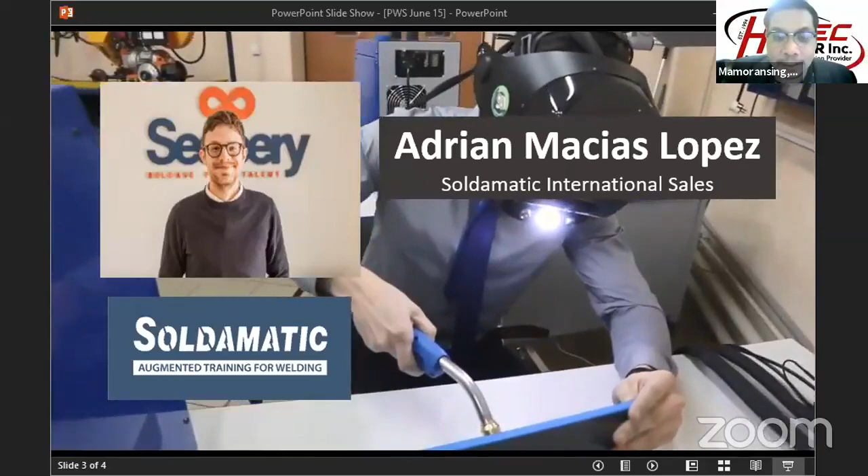Adrian? Hello everyone, and thank you very much, Chris, for the introduction. Is the sound going through? Can you hear me? Yes sir, is it going through? Loud and clear, okay cool. Perfect. Before we begin, can you please confirm how much time we have so both speakers can have the same amount of time for the presentation? Can we do it in 15 minutes? Okay cool, so I'll try to speed up some of the slides.

Thanks, Chris. So to start with, let me just share my screen.

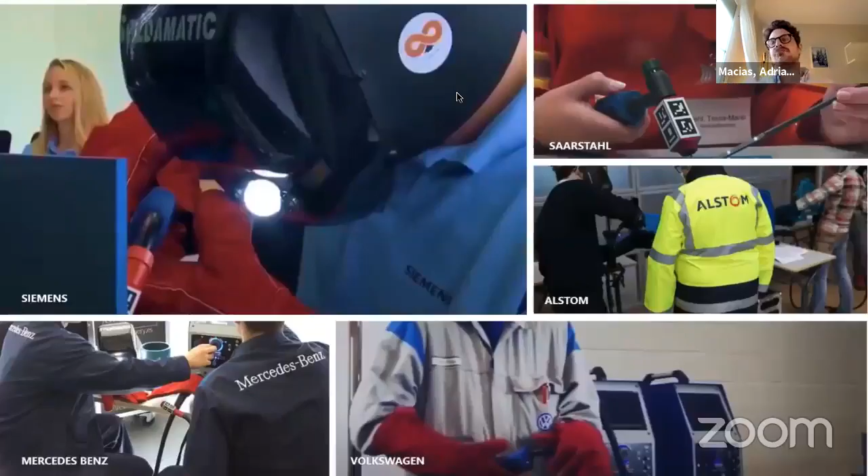And those clients are mostly in two different areas of work. We work with industrial ones, mostly in automotive, railway, shipbuilding, and energy, people like Volkswagen or Mercedes-Benz, etc. But also on the educational or institutional side of things, so we work with people like Weld Australia, the German Welding Society, or TAFE, also in Australia, which is the TVET organization of the Australian government.

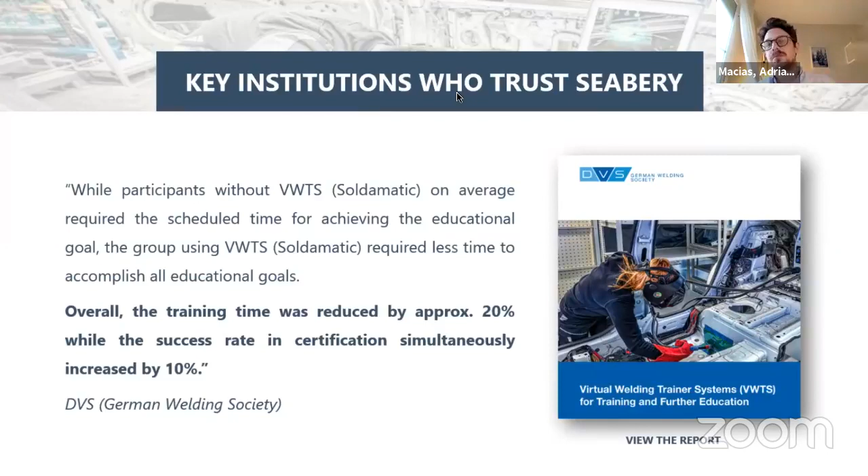With those organizations or bodies, we work for a couple of things, mostly supporting them on training, but also for feedback. So we basically collaborate with them to have their expertise and include it into the Soldamatic. People like Weld Australia or the German Welding Society are very much involved and aligned on how what I'm going to show you works in many aspects.

Having said that, I'd like to talk a little bit about the 4 or 5 macro trends that we have right now worldwide, and how those macro trends are related with robotic training or welding robotic training.

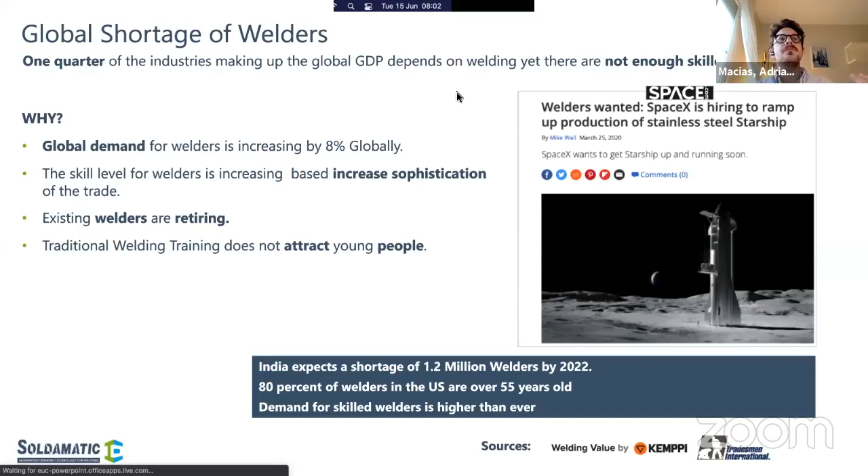The first of them is the global shortage of welders. That's something we see not only in Europe, even though it's most significant in European countries, the US, or some countries like India, but it's basically across the world. Almost every country has issues finding the welders they require to keep on going with the industry levels they have.

Countries like India, or even in Southeast Asia, it's very noticeable that the economies of those areas are having issues finding the welders required to keep on going with the industry levels they need to continue economic development. And that is related to how we are not being able to attract enough people into the welding world or welding career, which touches many of the aspects we are going to talk about today.

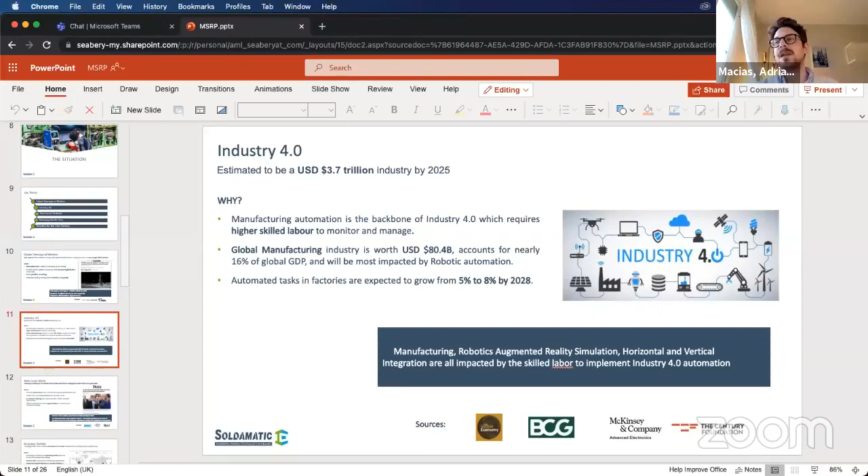Now the second big point—let me just share my screen back again—the second big point, which is actually related to what Stanislav was talking about, is Industry 4.0, which most of us are familiar with right now. That's basically how different technologies like augmented reality, automation, virtual reality, and others will impact the industry.

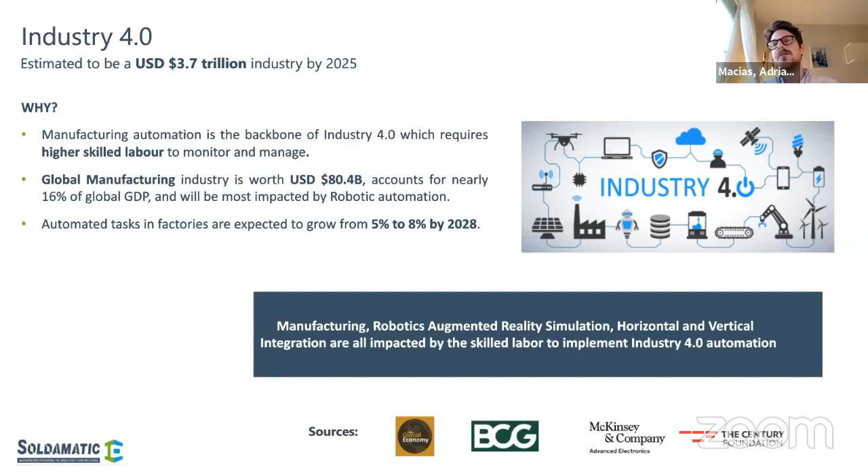What happens is that these new technologies are not being known by a significant number of the population at this moment. We are not training people on these technologies, or on how they affect the industry.

Now a third big trend, obviously, is the post-COVID world—the world that we will probably have in 1 or 2 years, and how it's going to look, and how it's going to affect industries, mostly for the educational side. Still, many countries, not only in Europe or Asia, are in total or partial lockdown, so people cannot go to schools or training centers. It's kind of unclear what is going to happen in the next few months or even years, and whether there is going to be any change because of COVID in that sense.

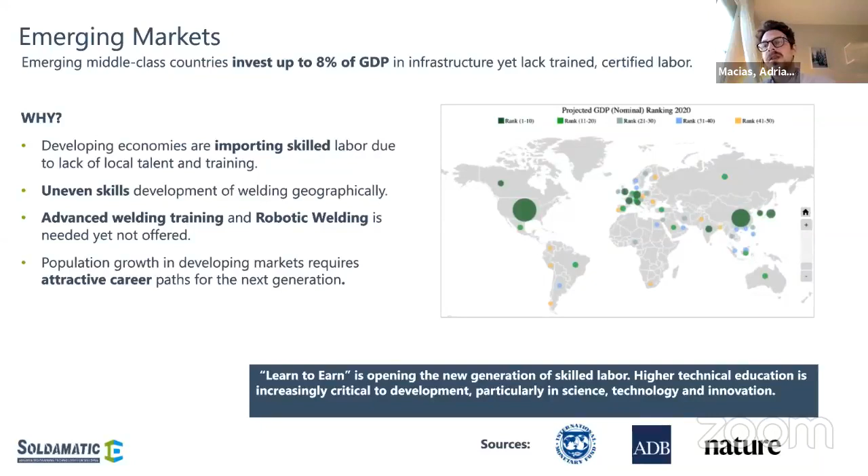Fourth is the growth of new markets or new countries, where the Philippines and Southeast Asia have significant weight. Countries like the Philippines are growing quite rapidly compared with European ones. In the next couple of decades, we're going to see how those countries in Southeast Asia acquire a much higher level of economic development. So those countries need quite a lot of training right now, or skilled people to sustain that growth, and they will need even more as they keep going on the path of economic development.

And the fifth one, probably the wrap up for these key trends, is how robotics are at the end of the day the backbone of automation and industry development. One big thing is that welding is behind almost any industry in the world and is somehow responsible for almost any economic development related to industry. And that is linked at the same time with robotics.

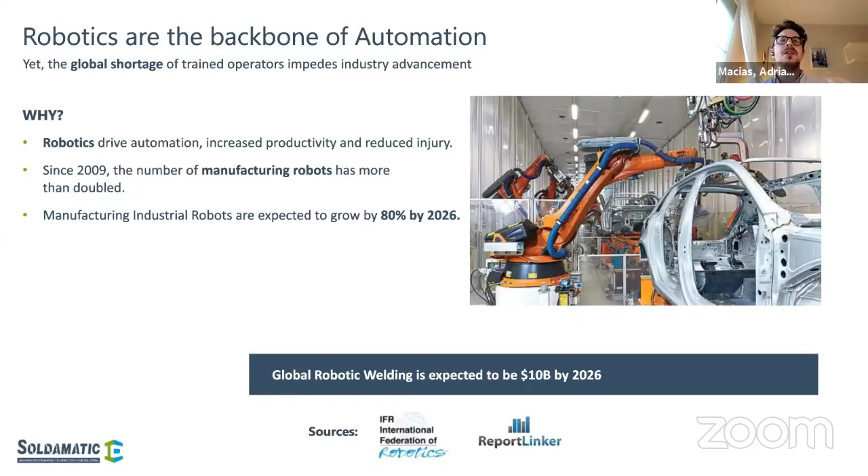So how are robotics going to influence that economic growth, and how are they going to influence companies to become more productive, more efficient? But more importantly, how are we skilling the people or training the people to get into that segment or area of expertise? We are not paying too much attention worldwide to these segments. It's basically been done the same way it was done 20 years ago.

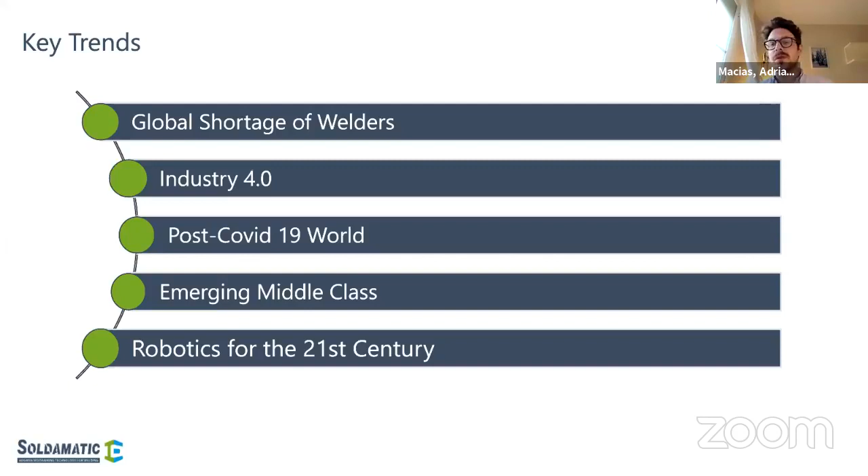So to help with that, we have designed SOLDAMATIC robotics, which is a solution that works with the same setup you would have on a production site, but with the benefit of augmented reality, which improves efficiency. There's no cost on consumables like gases or wires, but also way more control and vision on how things are going and the quality being provided by your program in the robot.

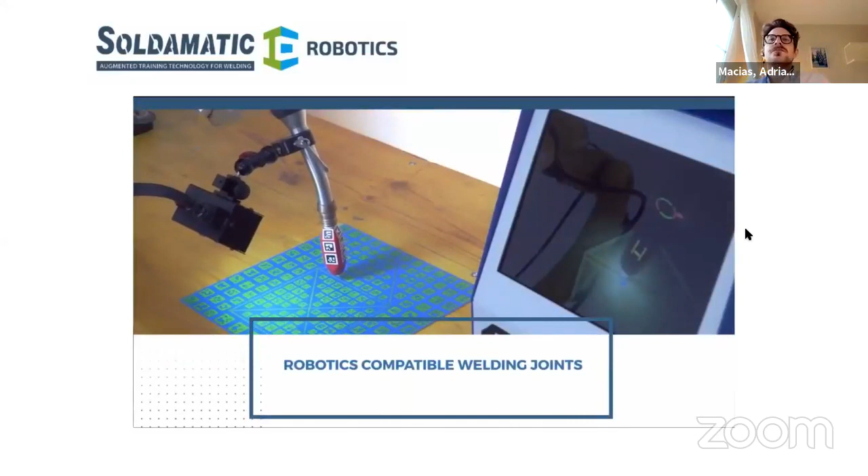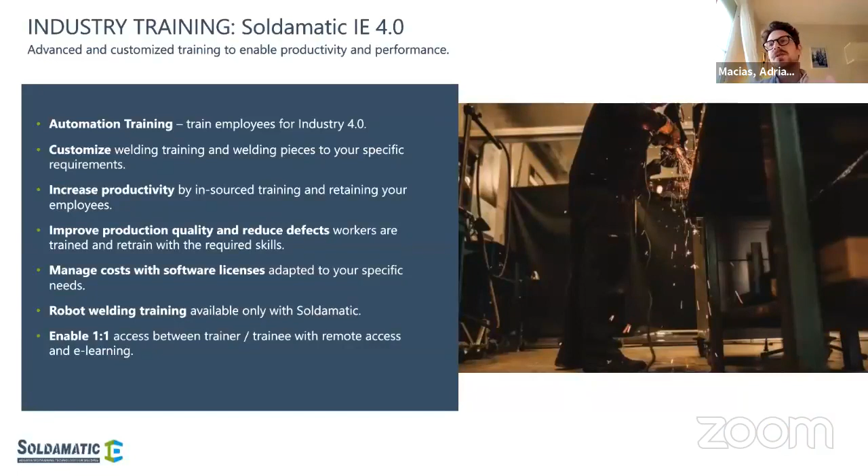Okay, so how does this work and what are the benefits? I'm going to skip some of the slides to make it a little faster. Basically, how it works is we have the Soldamatic, which, to put it in simple words, is a welding machine that works with augmented reality.

So you have most of the real components. The machine looks like a real welding machine, you control it like a real welding machine, and the connections, more importantly, are all real. The robot that you're going to use can be used with a Soldamatic or with a real welding machine. Everything that you set up works exactly the same way as on a real site.

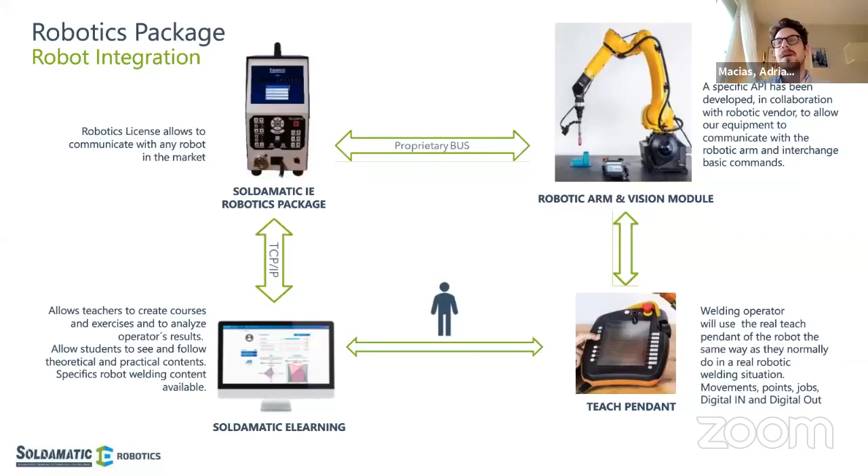Now the machine is connected to the robot, which at the same time is connected to the teach pendant. What you do is program everything using the teach pendant, just as you would on a real production site. The robot understands that you're working with a real welding machine, but you're actually working with Soldamatic, which leads to two big benefits.

One is that you don't have any consumable cost, so you can make as many practices, or do the program as accurately as you want, because the Soldamatic will tell you how close the programming you are doing is to the WPS that you put into the system. At the same time, it shows what type of quality you are getting out of that program, the machine will identify if you had any type of defect, like porosity, in your weld.

And what's great is that once you've completed the program using the Soldamatic, you only have to replace the Soldamatic with your real welding machine, and you can also replace the plastic workpiece, like this one, with the real one, and you can weld it. Because everything is set up and configured exactly as in a real environment, it's way more efficient, not only in terms of cost savings on consumables, but also the time you save programming that robot.

The Soldamatic is going to help you work much faster than you would in real life because you have all the guides. So it's going to tell you very quickly if what you're doing is correct or not.

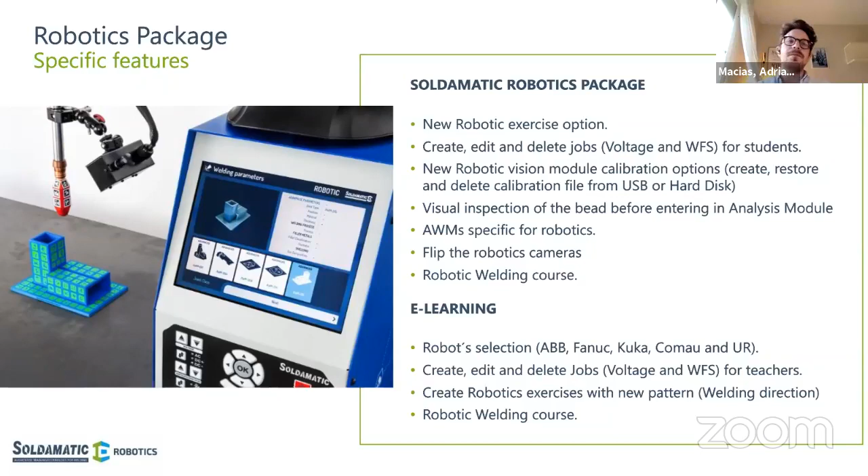Also efficiency in the sense of quality of the welding bead. Now the system is compatible with almost all machines in the market, so brands like ABB, KUKA, Fanuc, or Universal Robot.

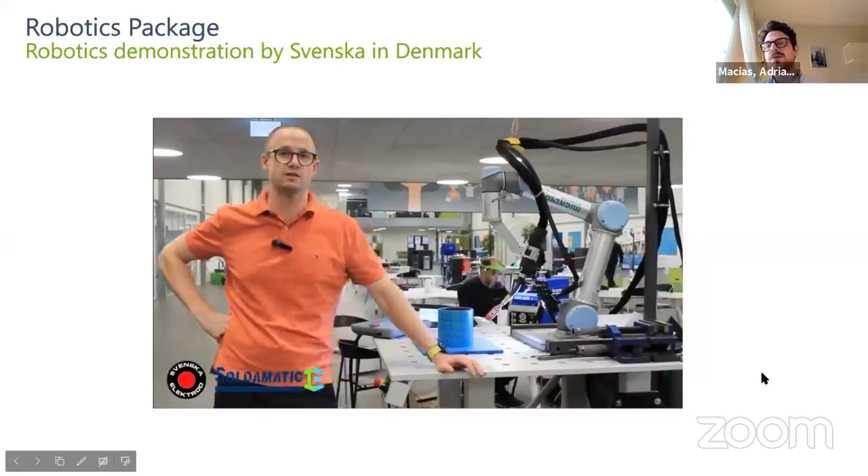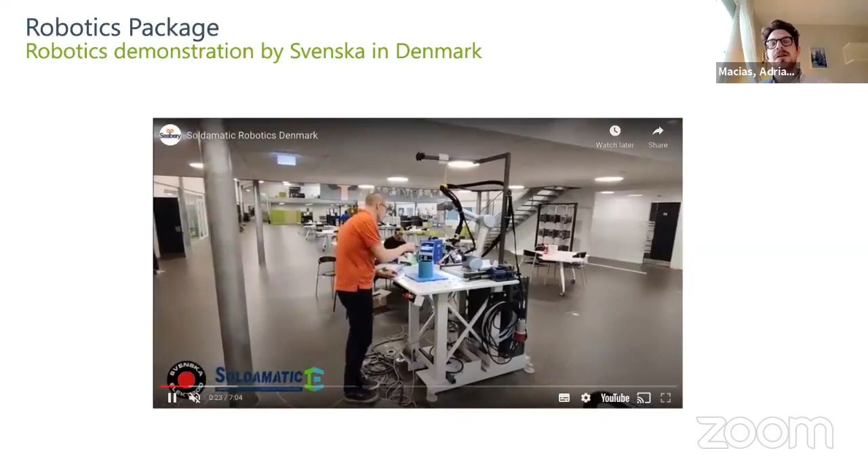As you can see, this setup was previously used with real welding machinery, and they just replaced it with the Soldamatic and the workpiece. On the screen you can see the Soldamatic screen, and they programmed using the same system, the teach pendant on the Universal Robot.

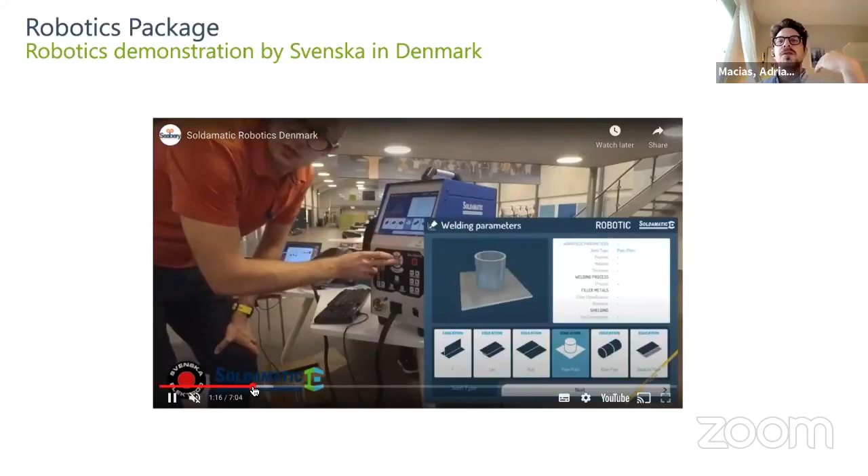What they achieve, once they have the theme programmed, let me skip a little bit, is the simulation with the robot and the Soldamatic. He's now testing if it was correct before striking the arc.

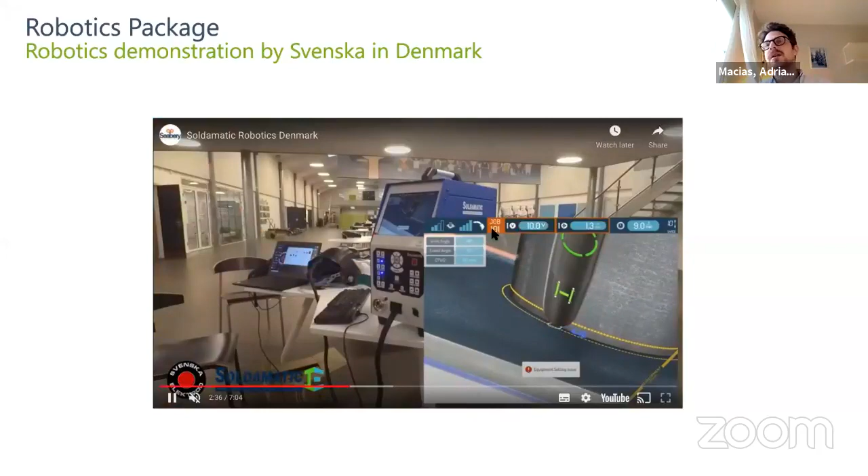From the Soldamatic, you can set up the machine as in the WPS, so you can set up the jobs like voltage, wire feed, etc. And you can try, which I think is very interesting.

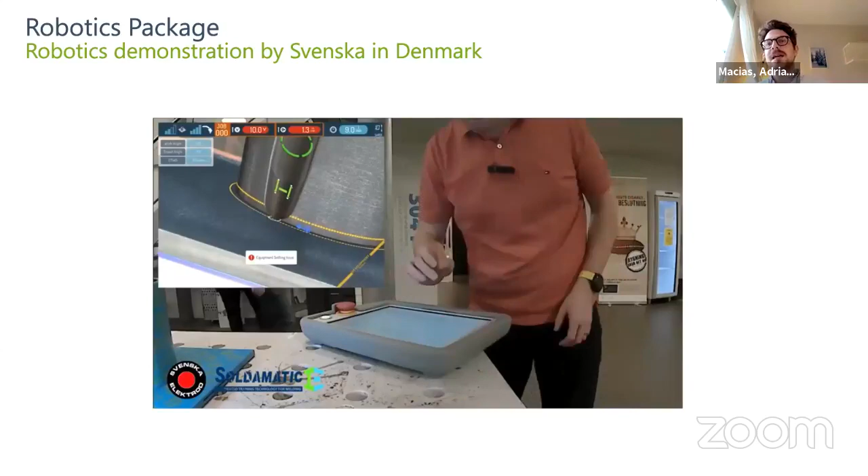You can test and see how different setups work on your workpiece. Whenever you change the voltage, you can see the effect graphically, but also the defects. If you change the type of voltage, you'll see if it's melting more or less material, if you're getting more or less penetration, or if you get defects.

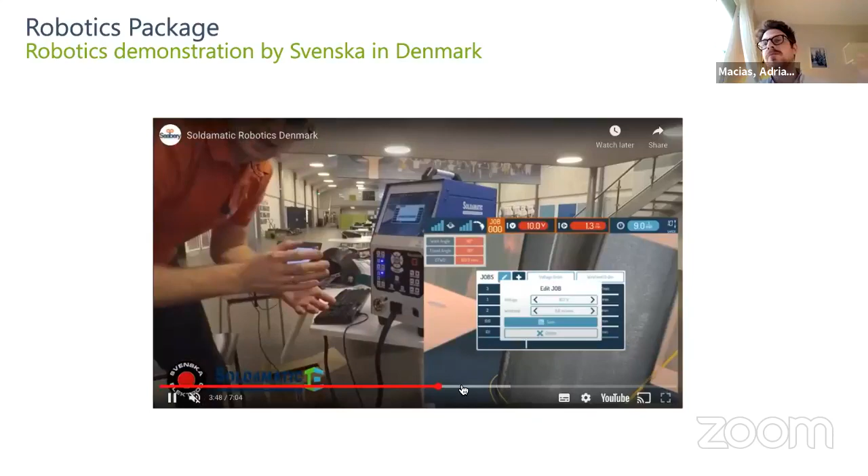So basically, to achieve the best possible quality, once he's ready with the parameters, he's going to strike the arc. He's configuring everything, starting over, and striking the arc.

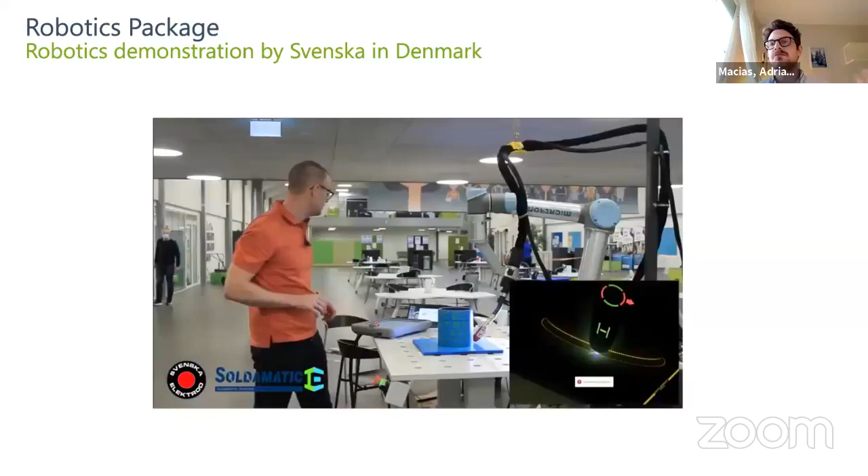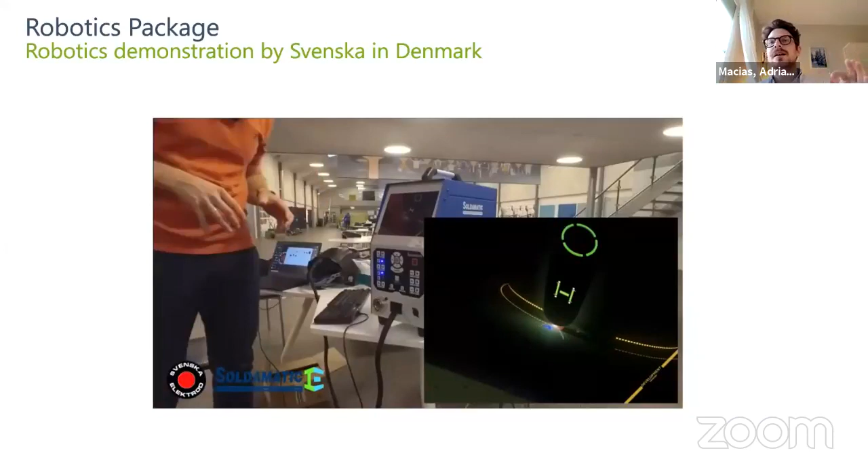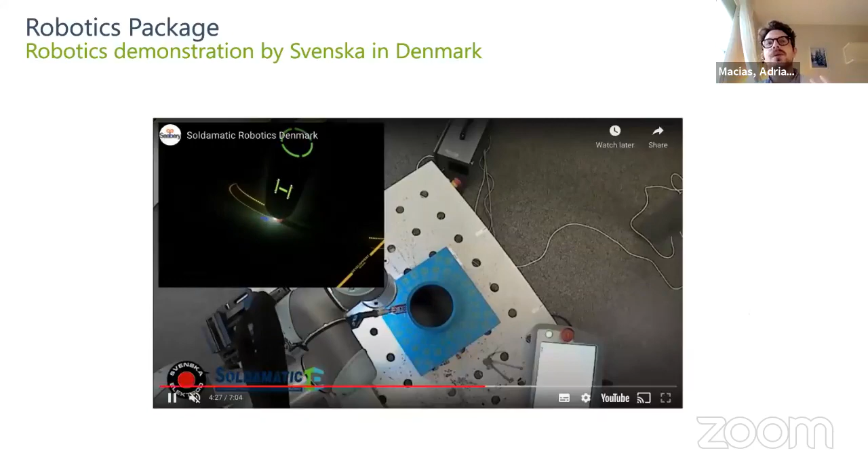You can see all the different guides in the Soldamatic. What's great is that he's putting a WPS into the system, and the machine tells him if the program he's doing on a real robot is correct or not, which in this case is practically perfect. You can see everything is in green, achieving the best possible quality or outcome on the workpiece.

So when he's finished, he can replace that workpiece with a real one into the exact same spot, basically replacing the Soldamatic tip for a real torch, and use it in exactly the same place.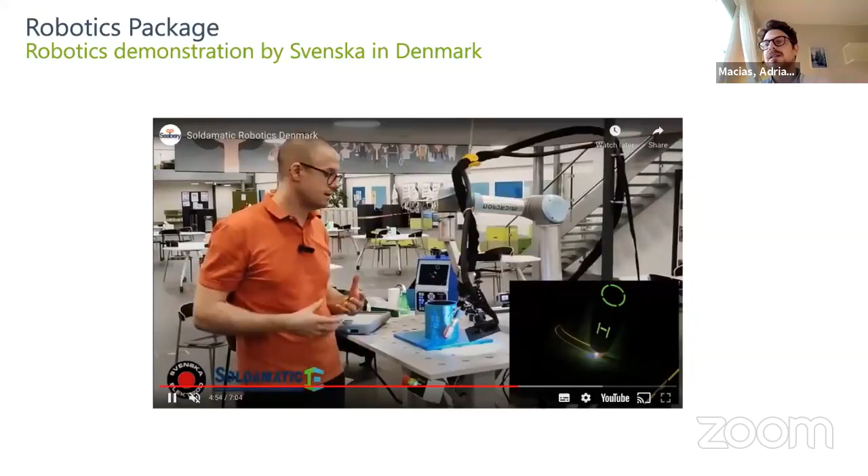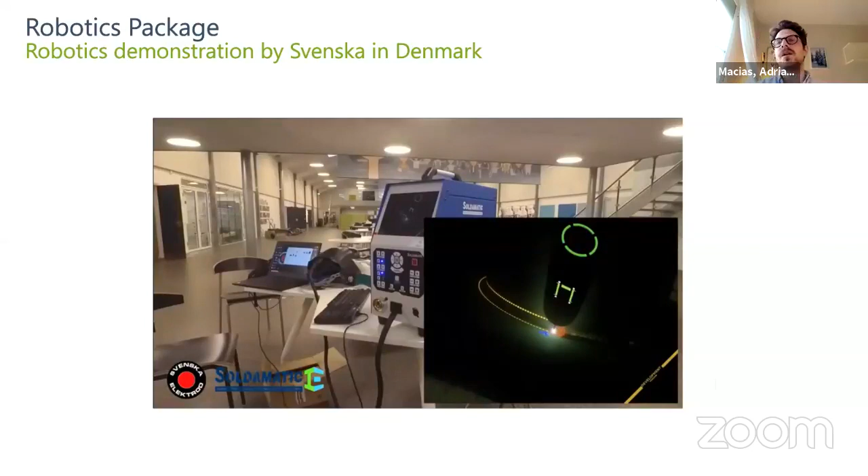Another great feature is that this can be controlled on remote systems or remote locations, so you can monitor everything happening through online stream applications.

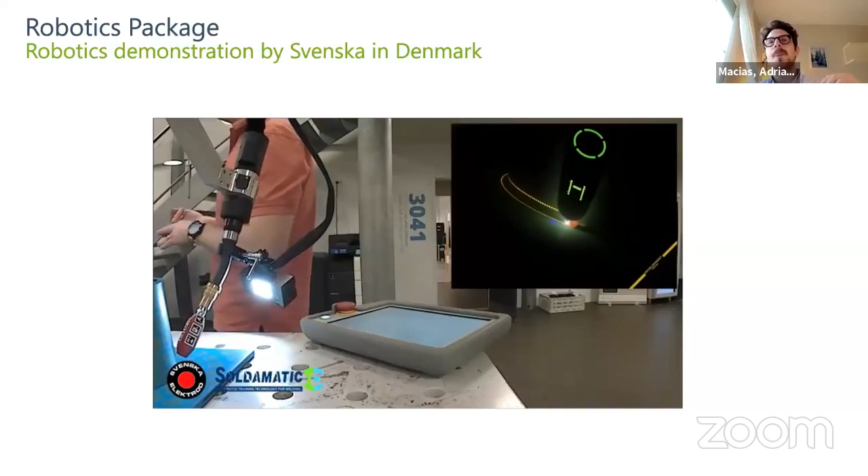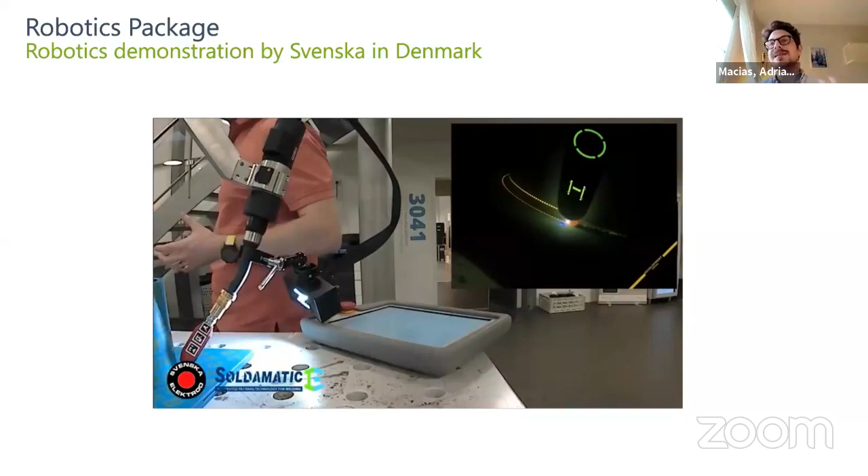From the Soldamatic Learning, for instance, you can see exactly how some of your employees are programming a robot that may be hundreds of kilometers away. You can see both graphically, this screen, but also the scores that he or she is getting.

So this is a little bit on how it works. I think I'm good on time. Once again, on this particular example, we're using a Universal Robot, but it's compatible with almost any system, including Yaskawa, ABB, KUKA, FANUC, etc.

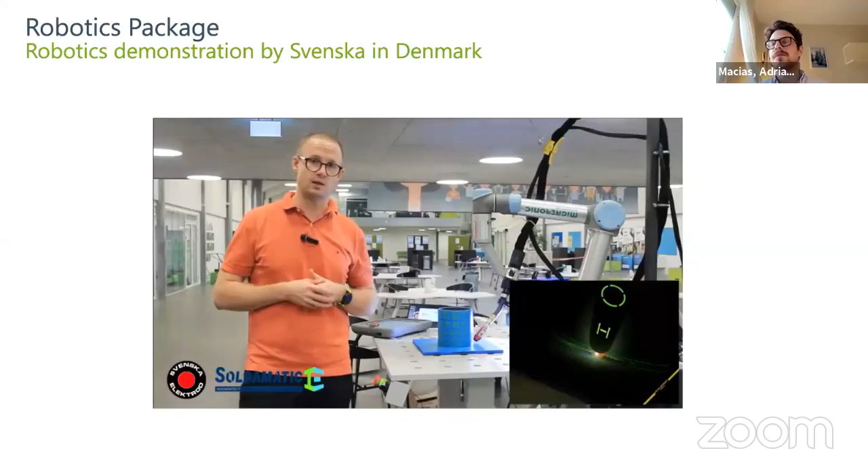This was just one practice case I wanted to share on how this technology, not only for robotics but also for manual welding, can be applied in the real world. It was a case we did with the German Welding Society, where they trained a group of refugees coming from different locations who didn't speak German or English, into welding and getting a job, basically becoming employable and skilled in less than two months, with a way higher success rate and faster than traditional welding.